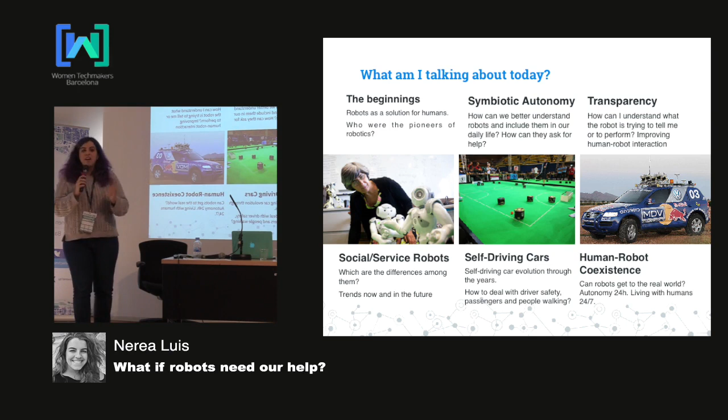Let's start with the key points of this talk. I was saying I'm going to talk about robotics. I hope you can all see what's here, but basically I'm going to talk about the beginnings of robotics. I'm going to talk about this concept called symbiotic autonomy. Then I'm going to talk about social and service robots, which are two main classifications of robots right now, at least the ones that can help us, not destroy us. And then I'm going to talk a little bit briefly about self-driving cars, human-robot coexistence, and transparency, which is a key point to grow robotics.

Okay, so let's say it's March 2018. We have heard about a lot of robots. We have the social robots, the service robots, the industrial robots, which were the first ones. And then we have self-driving cars from different companies, right? So everyone has heard about DeepMind, for example, or this Atlas from Boston Dynamics, or all these robots that have been created by Boston Dynamics, and the Falcon 9 from SpaceX. So everything looks really promising, right?

It's like the future is right here. Like we are really close to this imagined world that we have in our minds thanks to science fiction, for example. And basically what our present looks like is sort of like this. So we have the winner here, DeepMind, which won the championship of Go, which is like Japanese chess, kind of. And it was won, of course, with artificial intelligence, deep learning, concretely.

We have also these assistants, right? These voice assistants, like Google Now, Siri, Cortana, Alexa, okay, we have a lot of them right now. We have some robots, like this Asimo from Honda.

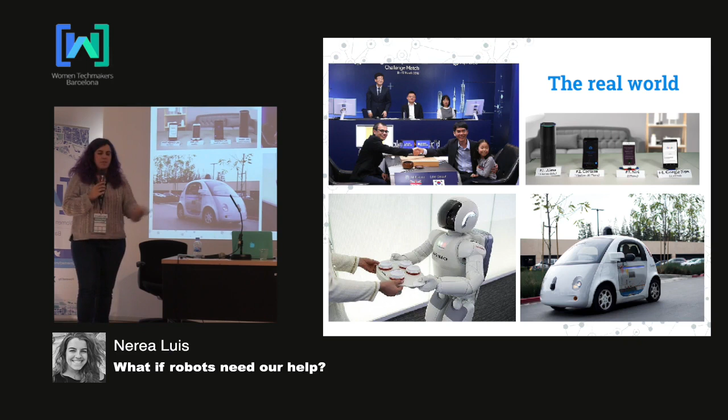And we have also self-driving cars. So this is what I was saying. It looks very, very promising.

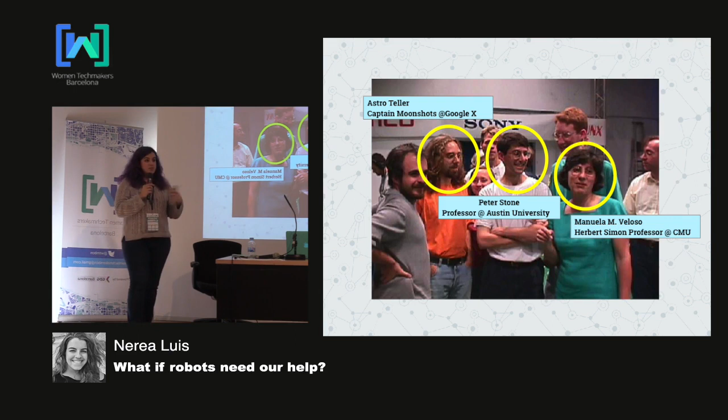So they were all at a conference thinking about the PhD topics of these students. She wanted to do it about robotics, but they weren't sure which part of robotics they should focus on. After being at this conference, they decided: if we want to be better at robotics, we need something where we can test our environment against some other environment that looks the same, so we can compete and make each other better over time, and with effort.

So what she founded was the RoboCup. Basically, the RoboCup is something that's now very, very famous, especially in robotics, but also outside of it. It's a robotics league of football. And what she did 20 years ago was define everything that was going to take importance in this league. They started with something very small that, after 20 years, is something really big, and it's like the main benchmark of robotics right now, in order to test your robots and get better in research.

So basically, you can imagine in 1997, it was very difficult to just put together a lot of research groups from all around the world. Just think that even email wasn't like it is now, where you can write a WhatsApp or something. So it took a lot of effort for her to convince other colleagues to just listen to her and to believe in her idea.

So the first competition took part in these years, and it was very simple. They had a team of 5 robots, maybe 5 or 6, and the idea was to achieve that this team of robots were able to strike a goal. That was the main idea. There was no artificial vision, there were no roles, there was nothing, but just trying to put them together to play and see what happens.

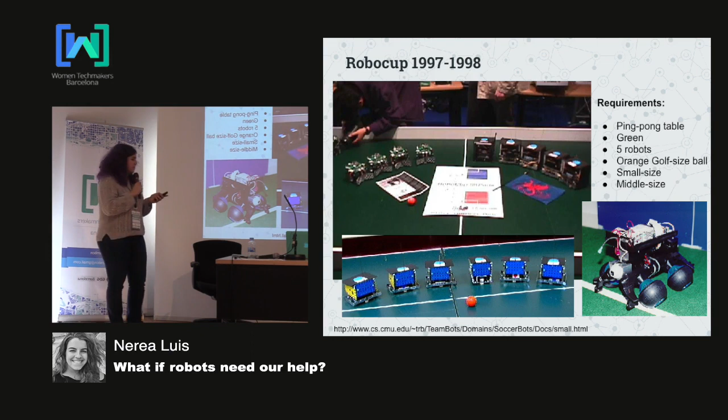So what happened is that they were going to compete in a conference in Japan. There were 5 teams from all around the world. It was very small, but still growing. And what happened is that Manuela won the competition with her team against France. You can imagine in 1997, if you saw the headlines of a newspaper saying 'robots are winning football competitions,' it's something that sells very quickly. So she appeared on all the front pages of the newspapers, especially in France.

And what she told me was that there's something additional to your work. She said, I knew that my idea was good, but for your idea to work, apart from passion, you also need time and a little bit of luck. This happened on this date, but she told me that if it had happened the next day, she would have never had that repercussion, because it was the day that Lady Diana died. So she would never have gotten the front page for this research project.

So that's why, after appearing in all these newspapers, she was able to obtain all this funding and trust from other people around the world to work on RoboCup and to succeed like she was doing. She's been working on RoboCup for the following 20 years until now.

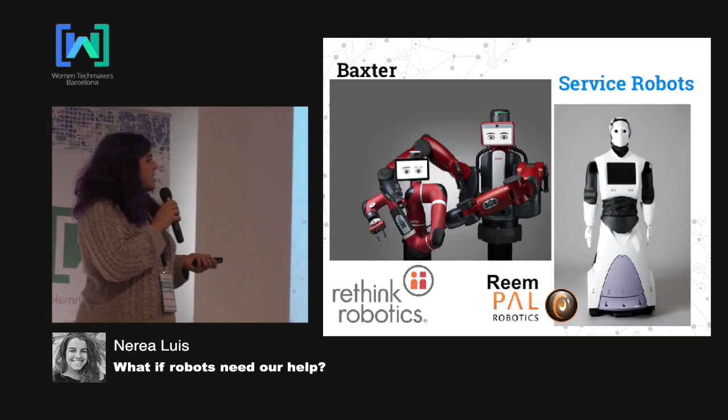And then we have Baxter, which at first seems a little bit weird, but it reminds you of these industrial robots. The magic about Baxter is that it was the first robot built for industrial things, but with materials that are easier to manage for humans. The problem with industrial robots was that they were really hard to manage with a human next to them because of hard materials like iron. But Baxter is made of plastic, and it has a lot of sensors all the way.

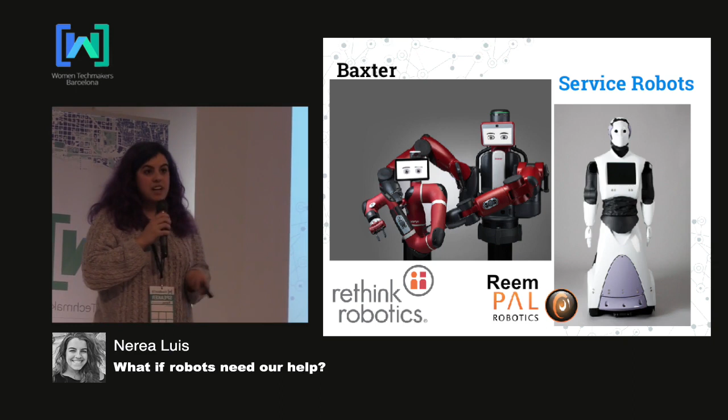So it was the first robot that allowed research groups to have them inside the labs without spending a lot of money to buy one. So it has a tablet as well in case you want to do something about interaction with humans. But basically they are used for tasks related with manipulation of objects. So it's nice that you have this version, because otherwise research groups would have everything way more difficult to improve in this kind of tasks, which are always very, very helpful.

So now, coming right to the present, where are the robots? The thing is that right now we know that the perfect robot doesn't exist. We know that if we want robots, we need to do something similar to what Manuela did in CMU. So we need robots 24/7 here with us, and in different places, of course. And they need to learn from humans, but also we need to learn from robots.

To test the robot in a real environment, they needed certificates to run everything safely. But they realized these environments don't only have adults, they also have kids, maybe brought to the office or picked up from school. So they hadn't tested the robot enough. What happens if you have a kid of a certain height, but you only tested for adult height? The kid gets identified as an object, so the robot might try to push the kid because it looks like an object. This sparked a lot of discussion about diversity, inclusion, and trying to test for everyone.

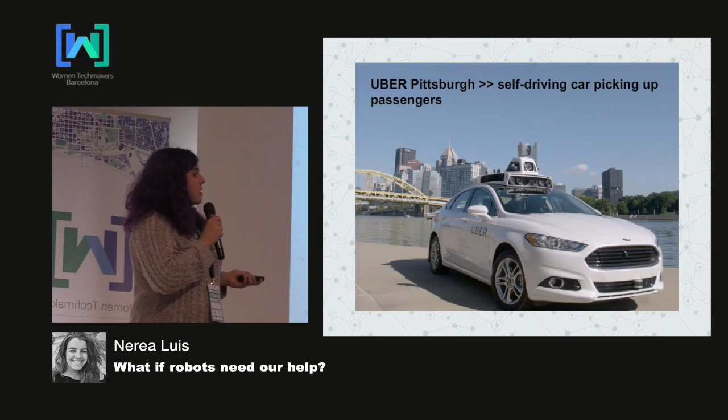Same thing with self-driving cars, I'll go fast on this one. Even though it can seem complicated, it's actually the opposite. It's easier to drive a self-driving truck, especially in the States, because these trucks are built for huge roads, and in the States those huge roads are mostly straight. So you just let your self-driving truck go and it reaches the goal point. But for self-driving cars, the problem is urban traffic and passengers.

Some key issues related to all this, and also robots, are safety, transparency, and continuous learning. About safety, sometimes when we see these robots or new AI things, we need to think less like humans and more like machines. I'm not saying we need to be harder, but sometimes we need to think out of the box and consider different designs. So with self-driving cars having trouble detecting things, what if we make a car that doesn't look like a car? What if we redefine the concept of a car, or put the lights or sensors somewhere else that we haven't thought of?

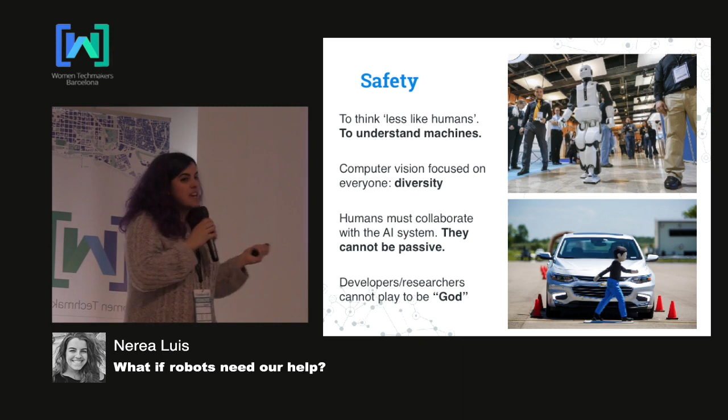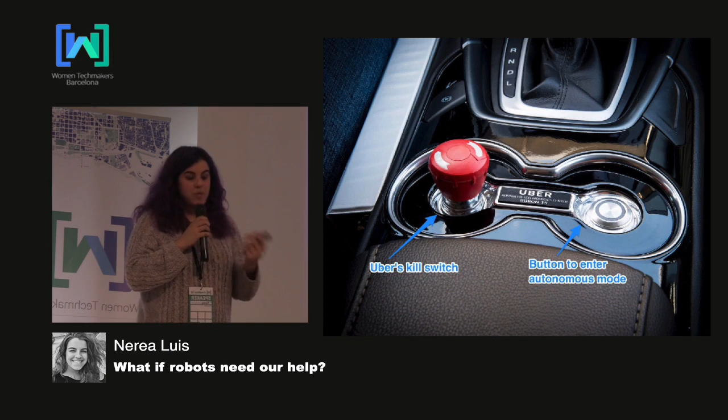And the same thing about being God as a developer. In these environments we have a problem when we are the ones programming the code or the decisions. Where does my responsibility stop, and where do I need to decide between this or that option when both are close to failing? In any case, what's really important is having a kill switch button that lets us stop whatever the AI is doing inside our vehicle or robot. We need to not be passive with these new ideas or systems we interact with. We need to be aware that I cannot get into a car without knowing how to drive.

Just imagine it's not that you have someone right in front of you and you are going to hit him. Imagine that suddenly there's a storm, and your artificial vision system is not going to be as good as when it was sunny, like today. So we need to be aware of that. We need always this collaboration of human plus the artificial intelligence system.

And of course we need to add expressivity, the last concept I want to introduce today, which in summary is called transparency. Transparency is about understanding what the robot is doing before it tells me what it's going to do. If you've seen some videos or demos about robotics, you've realized that at the beginning you don't know what the video is about, unless you have read the abstract. If you just see the video, sometimes it's really hard to get what the robot is doing. So basically, expressivity helps us go faster in that way.

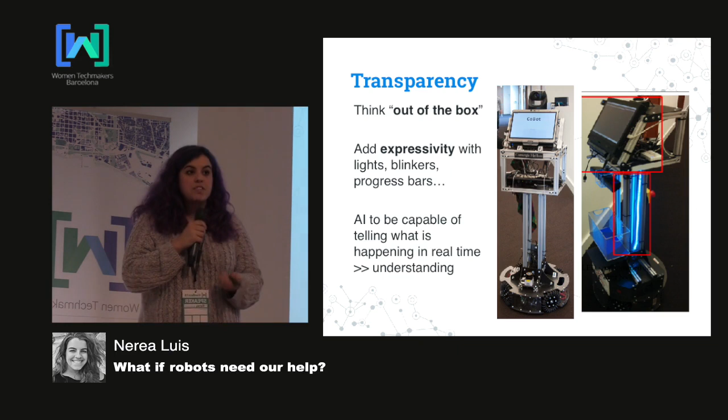And of course, continuous learning, as I was saying, symbiotic autonomy, this is really, really important.

Just to finish, some conclusions. I'm not going to say it, I'm going to give you some homework, because it's really nice to get more about this. I only have 40 minutes here, but I know you are probably very interested in these topics.

So one of Manuela's students is Astro Teller, who has now come up as head of Google X. If you haven't heard of Google X, I hope you have, but it's this innovation lab from Google in San Francisco, in some secret place. He is now in charge of different projects, but especially one about drones and how the concept of drones can change the concept of ownership. So I encourage you to check this interview, and also the one from Manuela, where she tells, even better than me, how humanity and AI is going to be something that needs to coexist, and that we need to get used to it in the best way we can.